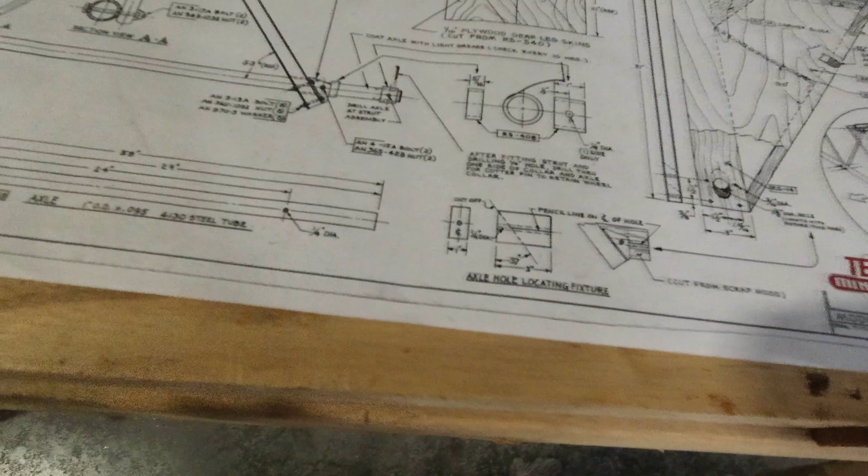Okay, so the first thing we have to do is make a block of wood that's 1 inch wide, same width as the axle, 3 inches long, and drill a hole right through the center of it all the way down. Then we end up cutting it at 30 degrees, and we use that to center up on the hole and drill the first hole through there.

First thing I have to do is get the saw out here, and I'll take a piece of 2x4 or something, and we'll cut a piece 1 inch wide by 3 inches long. It looks like it's 1 inch by -- doesn't really say the height. Guess it doesn't really matter.

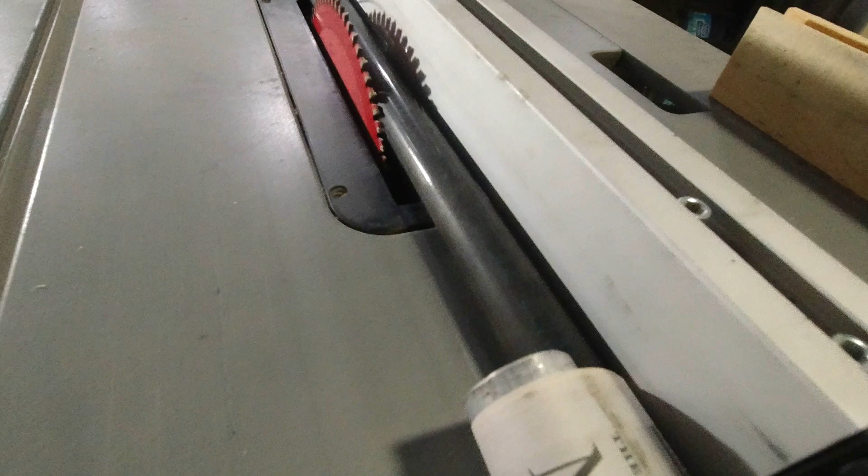Since this has to fit the axle, I'm going to use the axle itself to set the saw blade. I'll throw this up here like so, and then slide it over against my saw blade until I feel like I've got a nice fit there. Once I get that set, we'll take a little test cut and see how they match up.

So now we've got our block here. It's 1 by 3, and I made it 1 3/4 wide. If you're not familiar with this technique for finding the center of a block, what you do is just draw from corner to corner, and from corner to corner, and that finds the center for you.

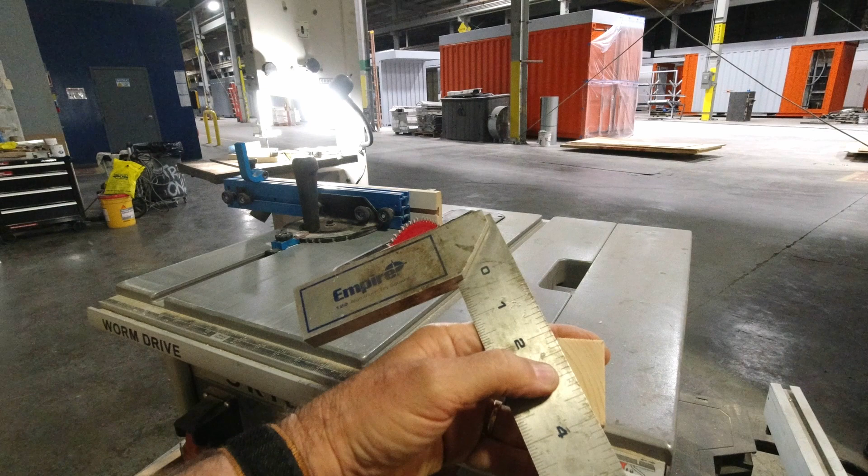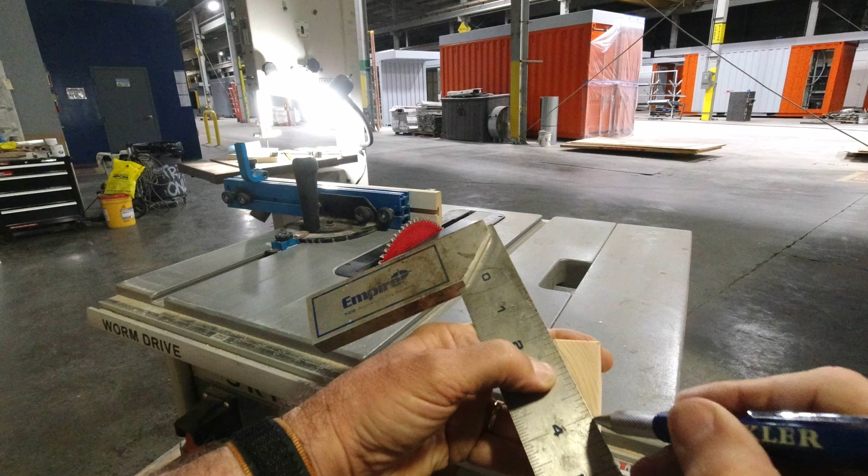So all we do is go from here to here, and then from here to here. I've got something in my hand that's a little heavier than I should, but I can make it work. And then right there is the center of our block.

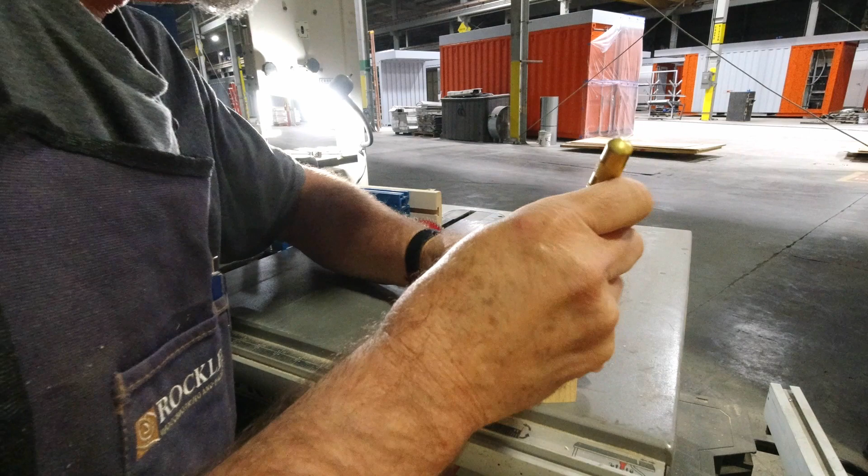So now I'll get my center punch and we'll hit that, center punch right in the middle. Something nice, mark right on the X. X marks the spot. Right there.

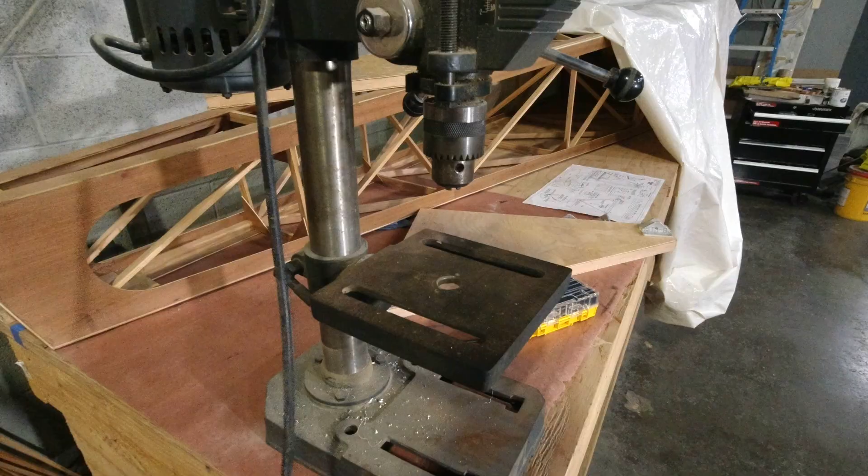All right, to the drill press. I realized in my last video that I was filming on this side and my hand was actually blocking all of the activity, so I've switched that around. This is a 1/4 inch hole.

The other thing we have to do before we drill this -- let me show you real quick. With the square, we need to make a line down the side on each side. So we'll come to the center of our hole here, see if we can get this, and center it up that way. Then we have to come on either side and make a line on either side before we drill this. So we'll do that here.

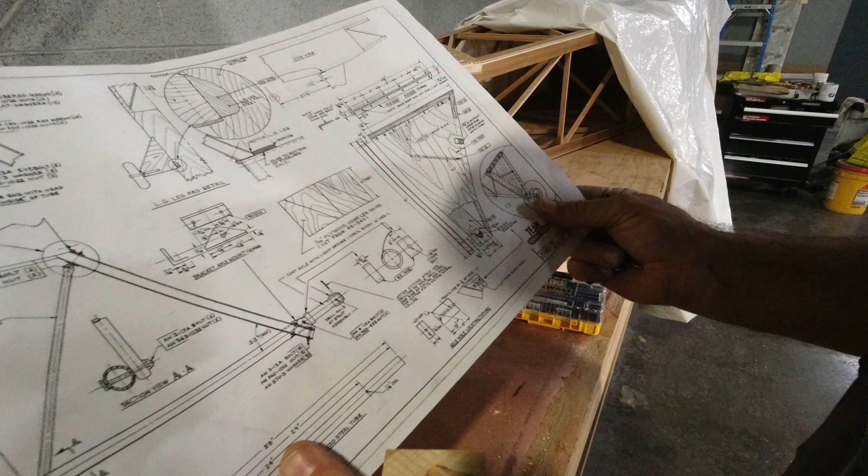So then the next step is to take the block, go over here to the table saw, and we have to cut a 37 degree angle. Let's just double check before we cut it. Yep, 37 degree angle off of the end. So we'll just cut 37 degrees here, and then our little jig will be ready to use. Okay, let's do that.

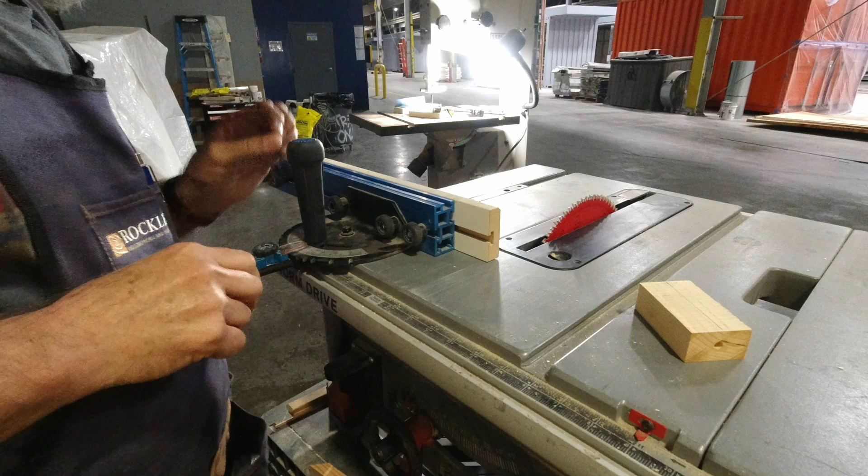All right, I'm gonna set up and show you how I set this up to do this. I know I've talked a lot about this Rockler miter for the table saw, but it's just such an awesome tool, and it has so many uses.

This piece right here, let me show you so you can see better. This piece just slides back and forth, but it actually locks into these slots at common sizes. This big knob, you just turn it to loosen it, and when you pull this one back, you can rotate it, or it'll just lock into 0, 15, 30, 22.5, if you're doing molding or something. But what's cool is you just pull this back, it's got this wheel on it, so you can tighten it down, and then you're free to rotate it wherever you want.

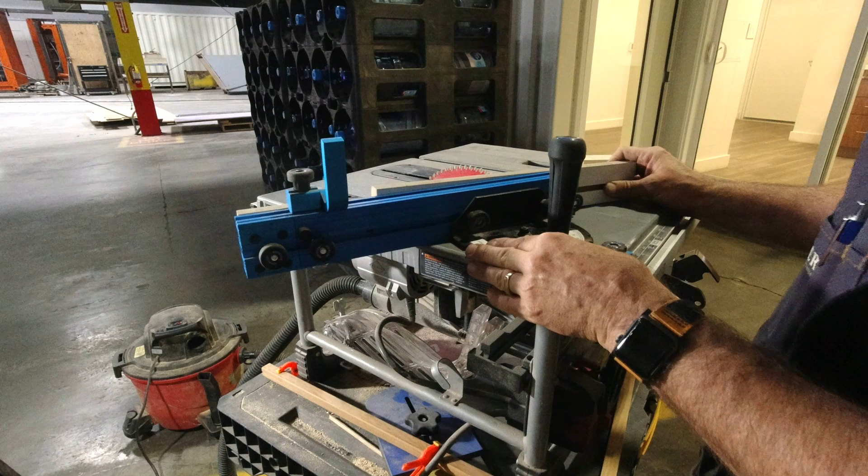So since I'm setting up for 37 degrees, it's really pretty accurate, so I can see my marks here really clearly. That's 37 right there. 36... 37. All I have to do is do this the other direction. Okay, let's back off, we've got to go 37 to this side. 35... 37... 35... 36, 37.

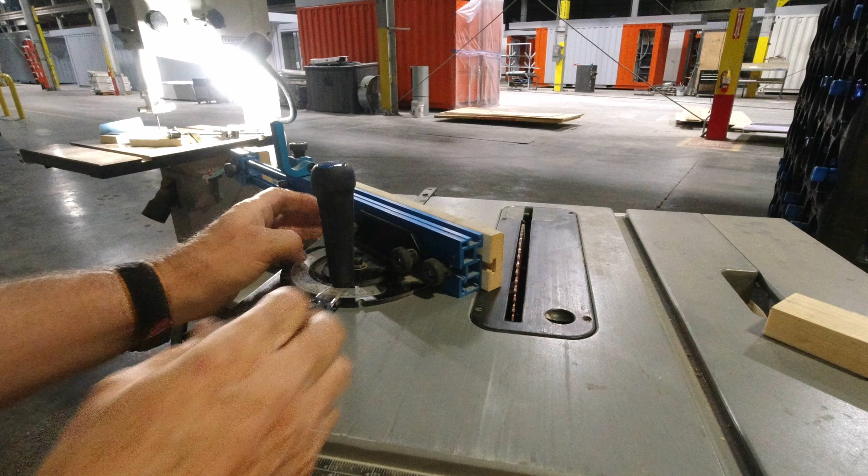Now this has to go back the other way. You can move this out to give yourself room, but I do the same thing. Let me bring you over here so you can see. I just bring this in just until I'm touching that edge of the blade right there, just barely, and tighten it back down.

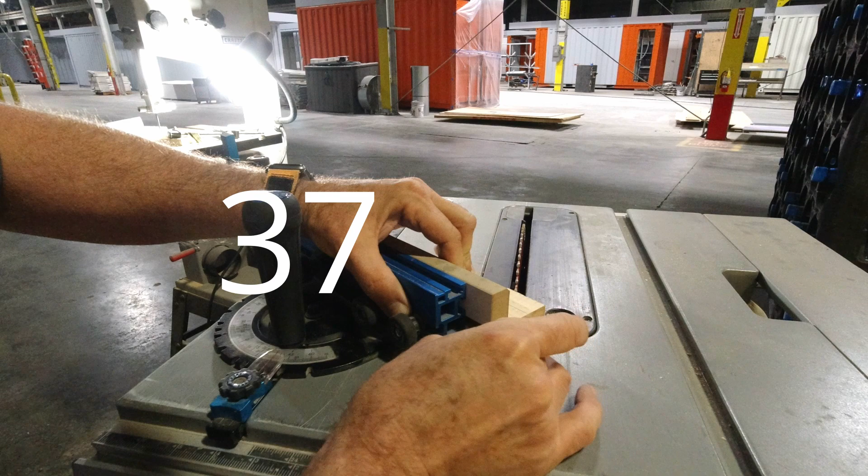Now what's cool is when I set my block on there, all I have to do is put this edge of my block up against the edge here, and then I'm going to get my 37 degree cut right there. Since I want to make double sure this doesn't move, I think I might grab a clamp and just clamp this in place. It tends to slide a little bit when I move across here, so I want to make sure it doesn't do that. So I may just clamp it real quick, just lightly, so it doesn't move, and then we'll be ready to cut it.

Make sure everybody's clear of the blade. Yep, we're good.

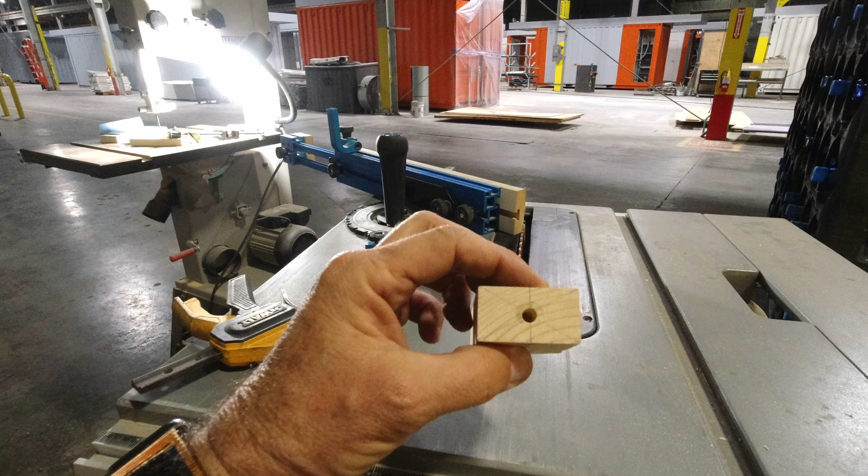All right, let's go get set up on the next part over here. So the first thing we're gonna do is give ourselves a center line. Oh, and by the way, I've already taken the flush router and routed all the edges flush for now. These will get rounded after we finish this part, but for now everything is routed flush. You can see I like to keep just a little bit of material on the edge, and then I'll end up routing that off before I round it later.

Yeah, so we'll just find the center here. We should be somewhere around 3 inches. I am just slightly over that, I'm like 3 and a 16th. So I'm going to measure it this way. 3 and a 16th, so 1.5 and a 32nd gets me there.

And we're going to draw that center line here. Right there. And then it says our holes are 15/16 from the center line to where the holes go. So I think what we'll do is see how that works out when we take our piece here, and we'll actually mark a half inch on this side. Half inch is right here. And then we'll do the same on this back side.